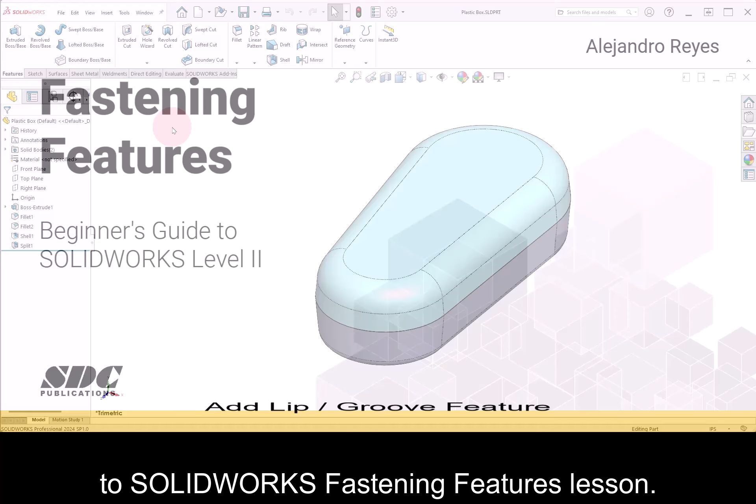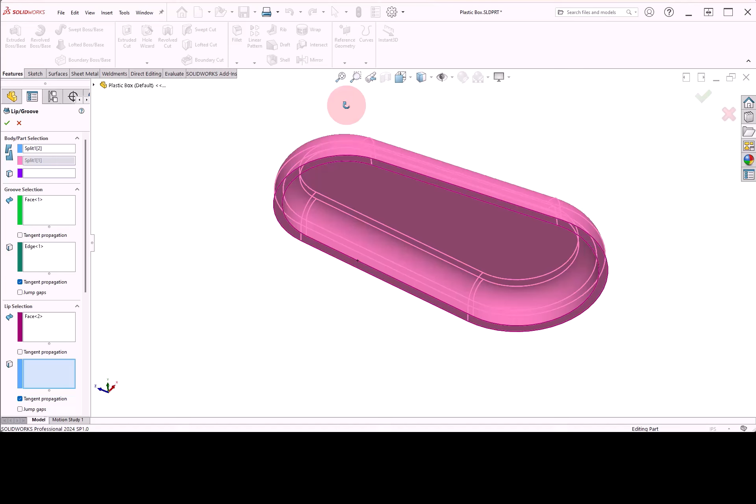Using the plastic box part, click the menu Insert, Fastening Feature, Lip Groove. Add the bottom body to the groove and the top body to the lip selection box. Select the edge for the groove and the edge for the lip. In the parameters section, enter the lip and groove values indicated, and click OK when done.

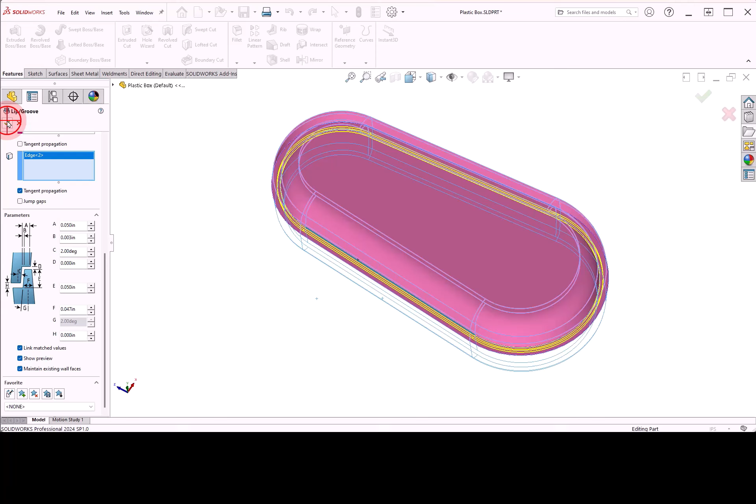Switch to a front view and make a section view to inspect the result.

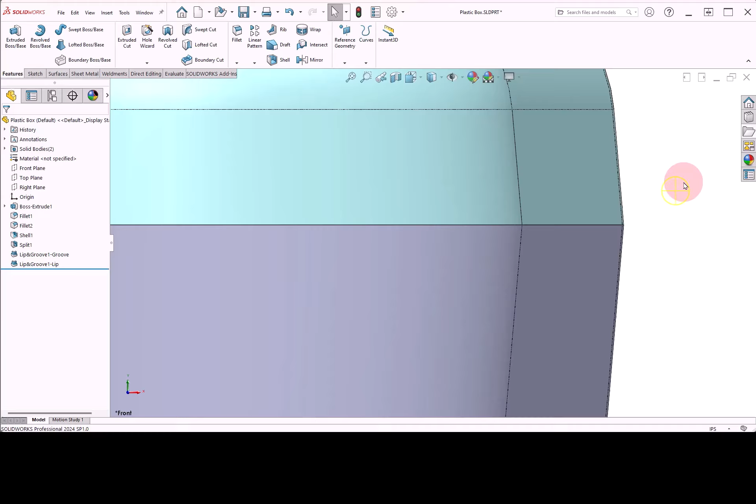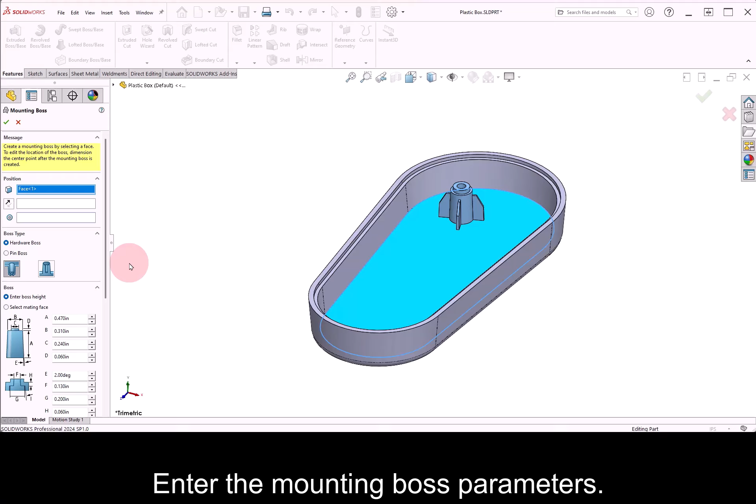Hide the lip body and click the menu Insert, Fastening Features, Mounting Boss. Select the face indicated, enter the mounting boss parameters, and align the fins with the right plane.

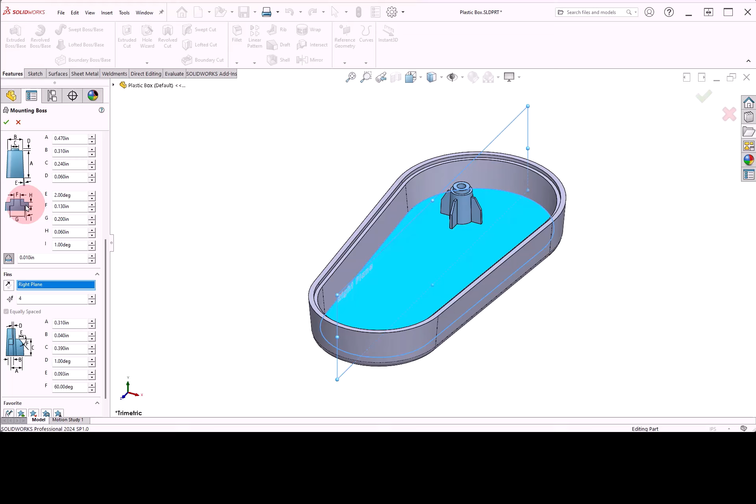Click OK to continue. Expand the mounting boss feature and edit the 3D sketch. Make the point concentric with the edge and exit the sketch.

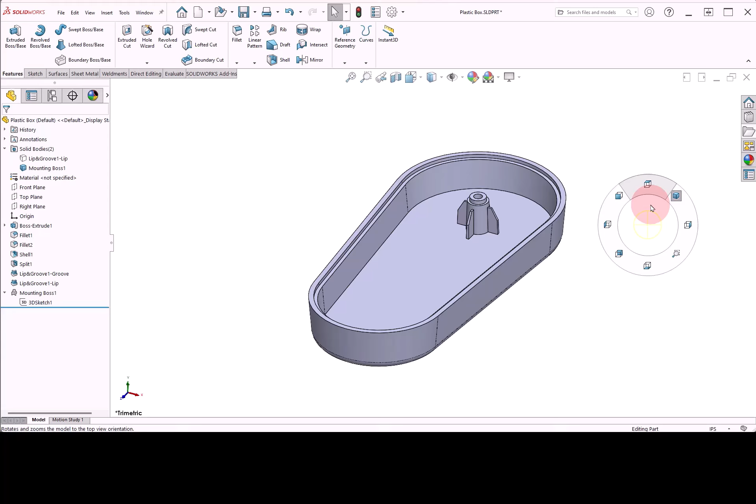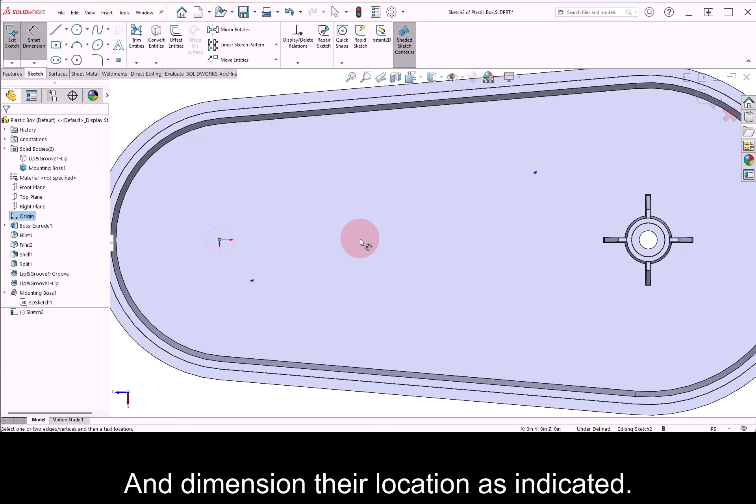Orient the model and make a new sketch on the bottom face. Add 2 sketch points and dimension their location as indicated. Exit the sketch when finished.

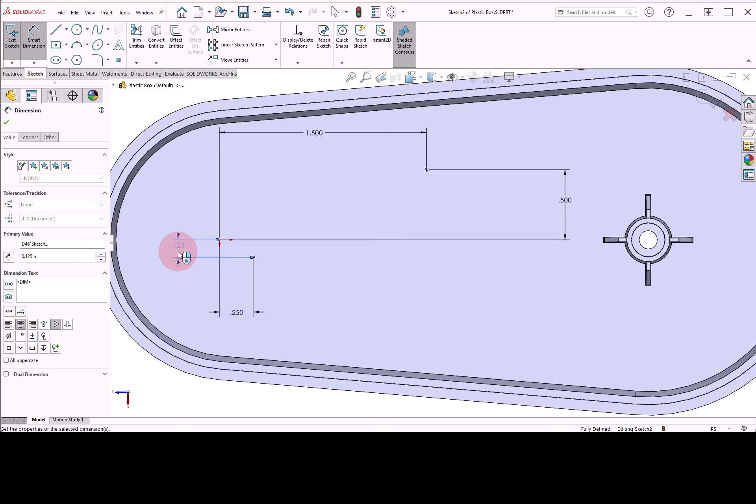From the Linear Pattern drop-down, select a Sketch-Driven Pattern. Select the new sketch, add the mounting boss to the features list, and click OK.

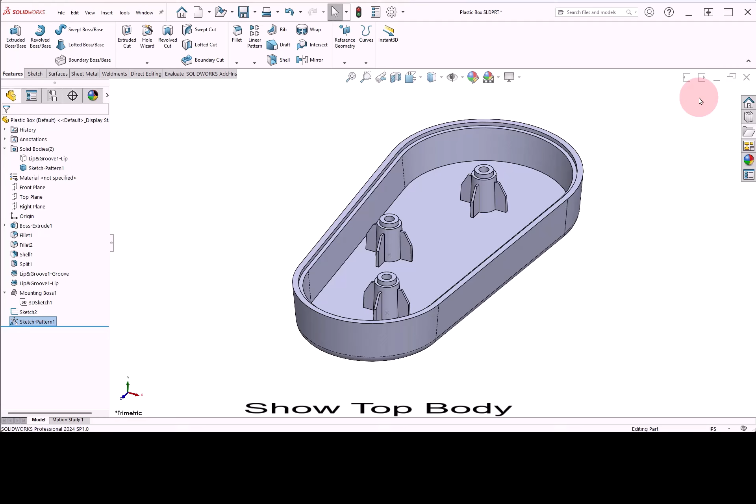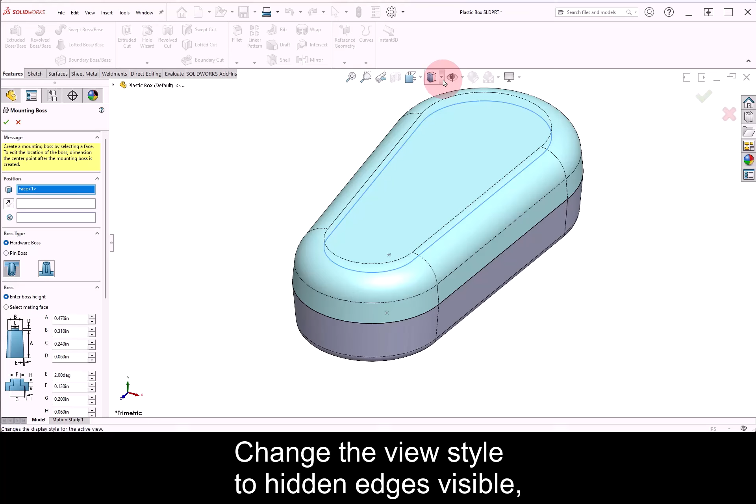Make the lip body visible and click the menu Insert, Fastening Features, Mounting Boss. Use Select Other to select the inside face. Change the view style to Hidden Edges Visible and select the circular edge to position the mounting boss.

Enter the mounting boss parameters. Align the fin with the edge of the previous mounting boss and click OK.

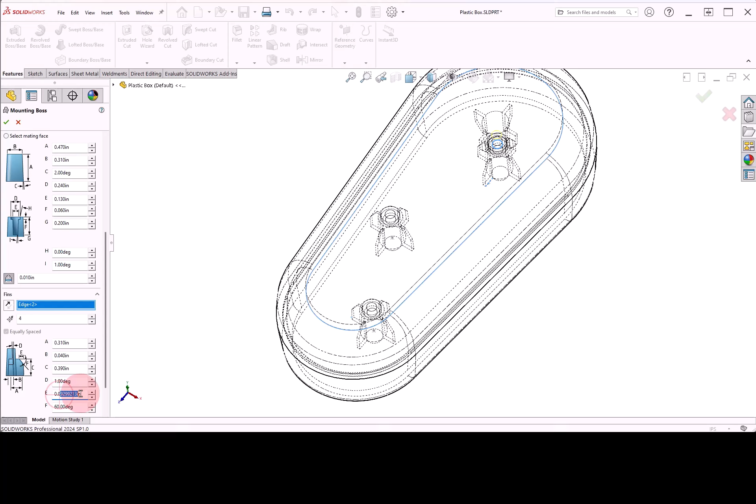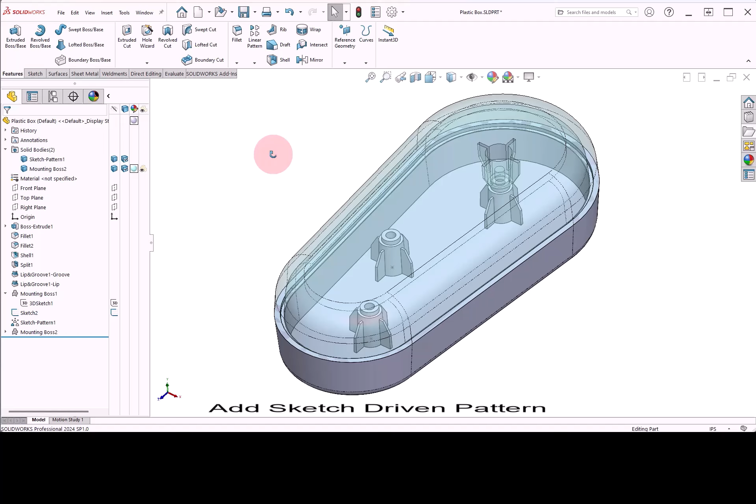Change the view style to Shaded with Edges and make the top body transparent. Add a new sketch-driven pattern. Select the same sketch, add the new mounting boss to the features to copy, and click OK.

Hide the groove body and the sketch used for the pattern.

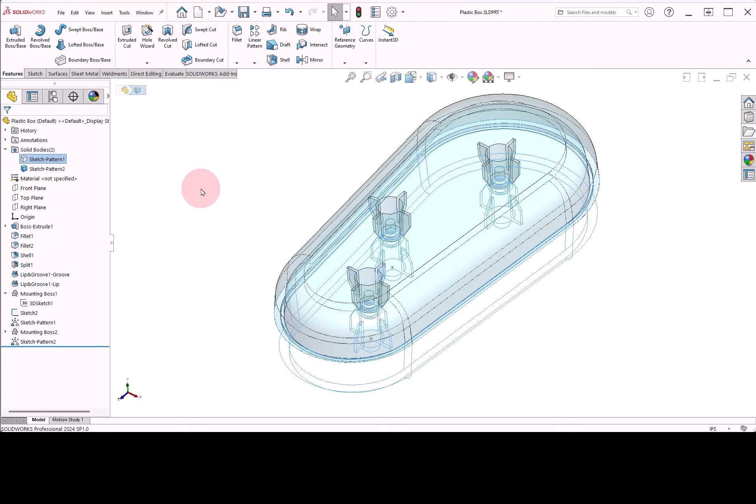Go to the menu Insert, Fastening Feature, Snap Hook. Select the edge to locate the hook and the faces to orient it.

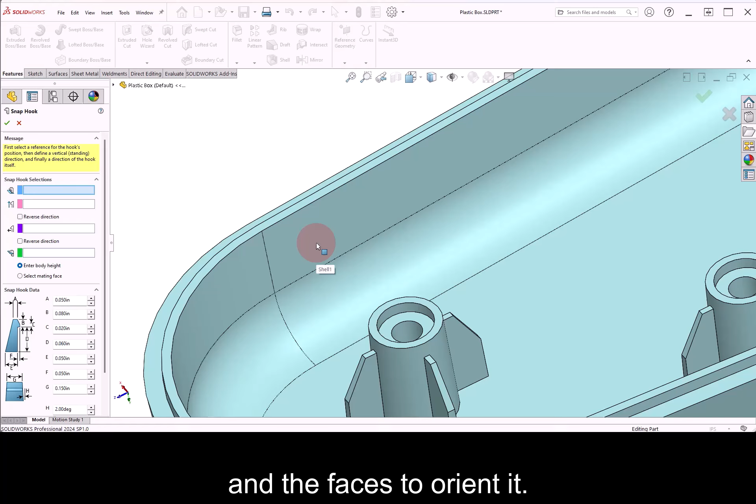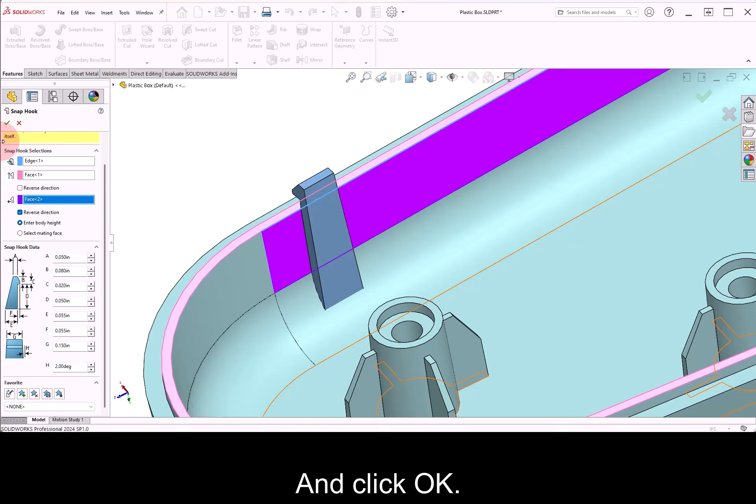Enter the snap hook parameters and click OK. Expand the snap hook feature and edit the 3D sketch. Dimension the location point and exit the sketch.

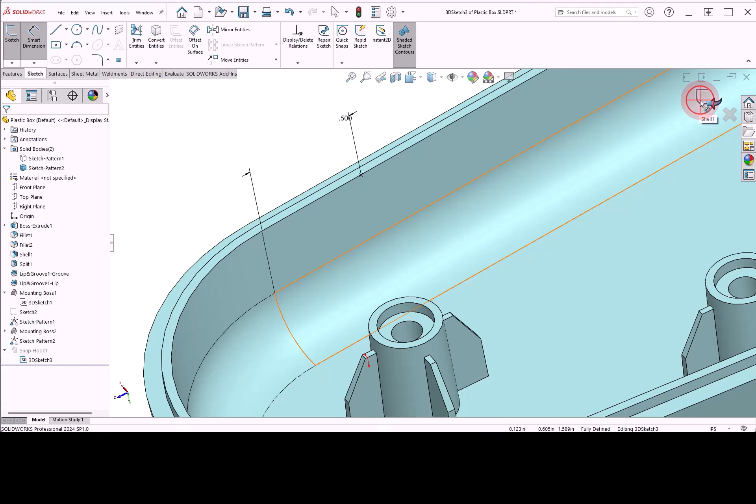Add a linear pattern. Select the direction, spacing, and number of copies. Add the snap hook to the features to pattern and click OK.

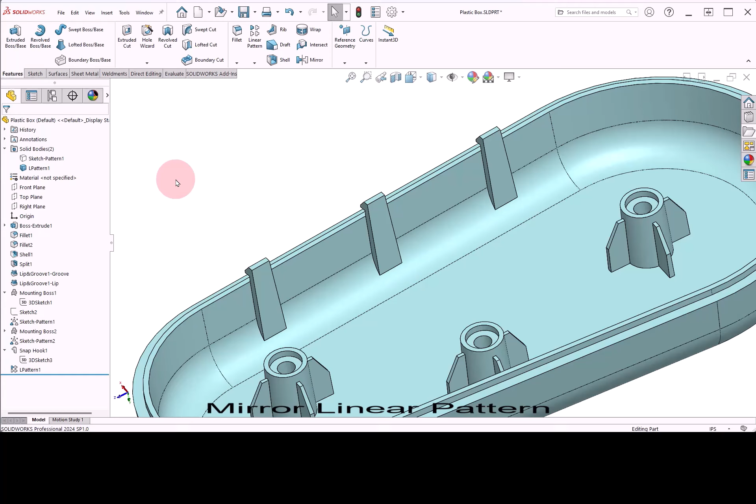Mirror the linear pattern about the right plane to finish the snap hooks.

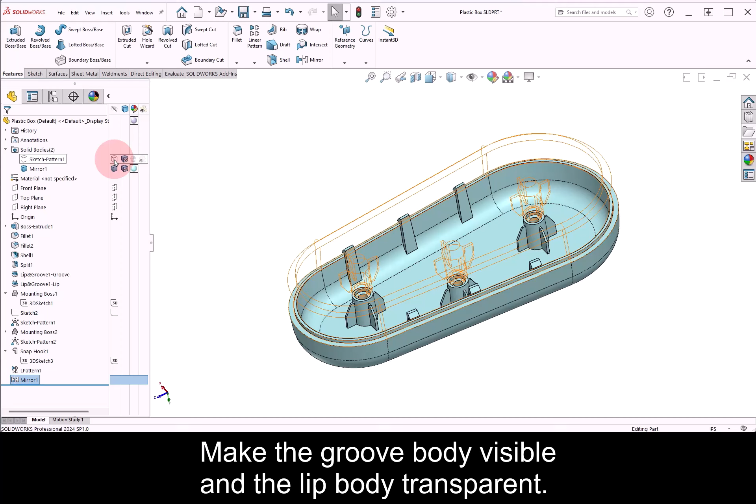Make the groove body visible and the lip body transparent. Reorient the model. Click the menu Insert, Fastening Features, Snap Hook Groove.

Select the snap hook feature. Select the groove body. Enter the groove's parameters and click OK.

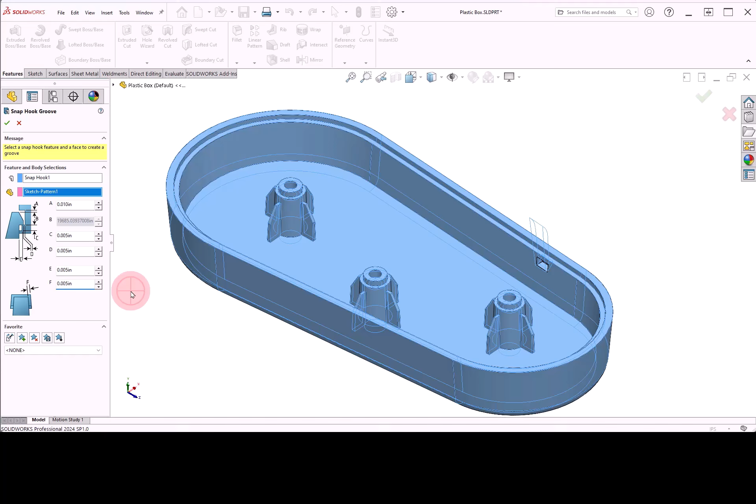Hide the lip body to continue. Add a linear pattern of the snap hook groove, select the direction, spacing and copies, and click OK. Mirror the linear pattern about the right plane to continue.

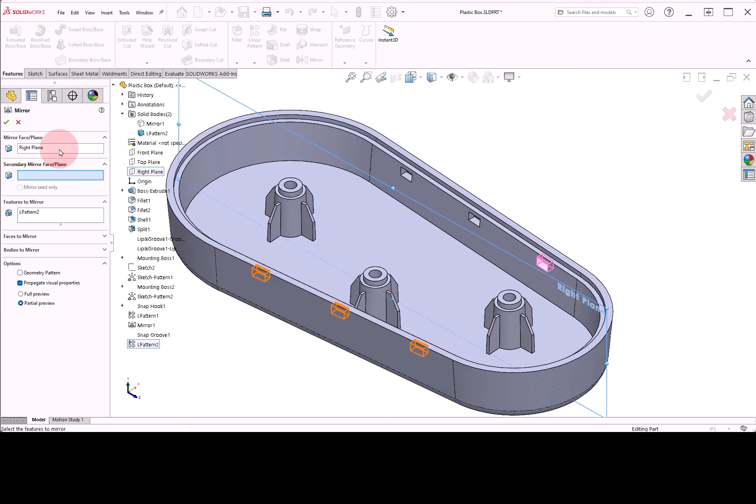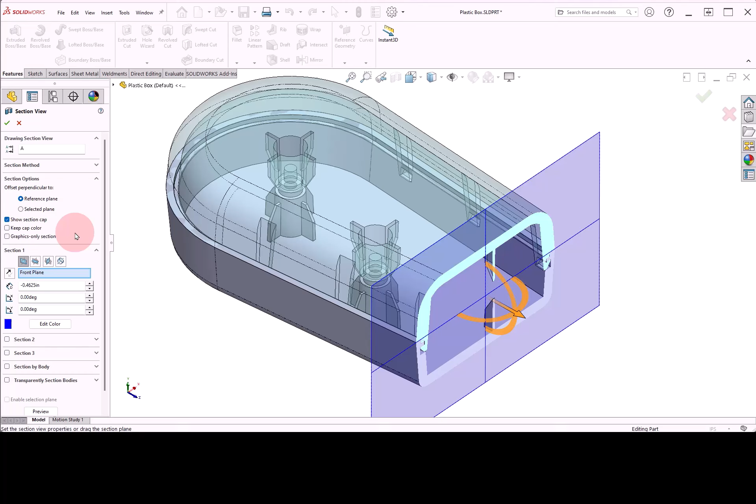Make the lip body visible and add a section view to review the snap hook features. Exit the section view to finish.